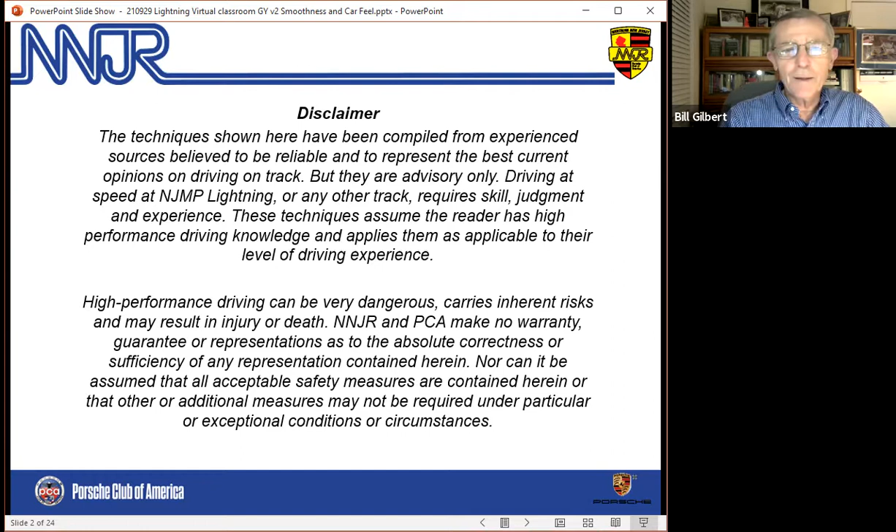So the topic is smoothness, as I said. The beginning here, as always, is just that the caveat applies that we all know when we arrive at the track, we're taking a certain amount of risk, and we're taking that risk for ourselves. So despite anyone, including my best attempt to offer good advice, you have to use your own judgment.

So what I'm going to cover tonight: a quick reminder on the basics of track driving for those who are relatively new to driving on track. Most of our focus will be on smoothness. What is it? Why does it matter? And then how to achieve it, or how to get better at it, including how to read the car. And then we'll jump into turn by turn for Lightning.

So the basics of track driving, I think most everyone on the call tonight knows these things. The reference points kind of tell us how to drive a consistent line, starting with where we get on the brakes, going to where we turn in, where we apex, and where we track out. That sounds pretty simple. We all know it's not quite that easy to do it consistently, which is the key thing here, emphasis on consistent.

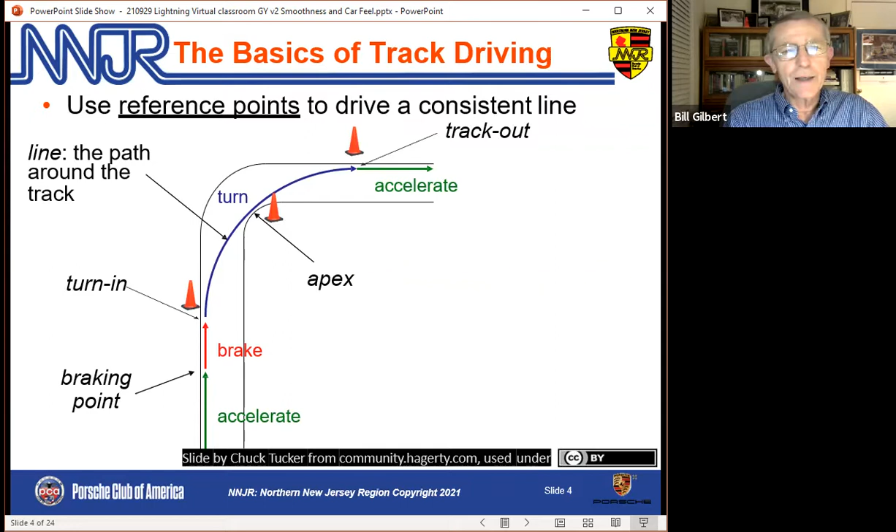And if we do it right, there's a rhythm to that, right? As we get used to a track or a particular corner, we're on the gas going down the straight, we're on the brakes, we turn in, we release the brakes. We repeat that process as we go around the track.

I always like to remind people about mirrors. Most of you on this call have heard me say this before, so I'll do it quickly, but mirrors need to be adjusted properly, starting with getting yourself seated properly. And then most people have the rearview mirror in the correct place, able to see square behind the car and as far as possible. What many people don't have adjusted properly are the side mirrors.

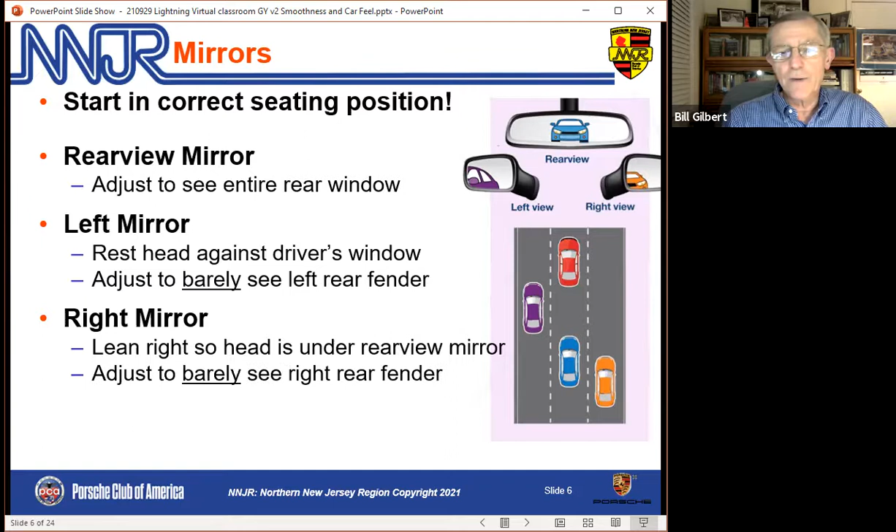So the left mirror needs to be generally pushed out, and you do that by putting your head against the driver's window and pushing the mirror out until you can just see the back corner of the car. And then you do the same thing on the right by leaning your head under the rearview mirror and pushing it out. And when you do that, you basically don't have a blind spot. So instead of the normal situation that you see here, where there's a blind spot that'll absorb a whole car, even a whole truck if you're on the highway, you end up with either very small or no blind spot.

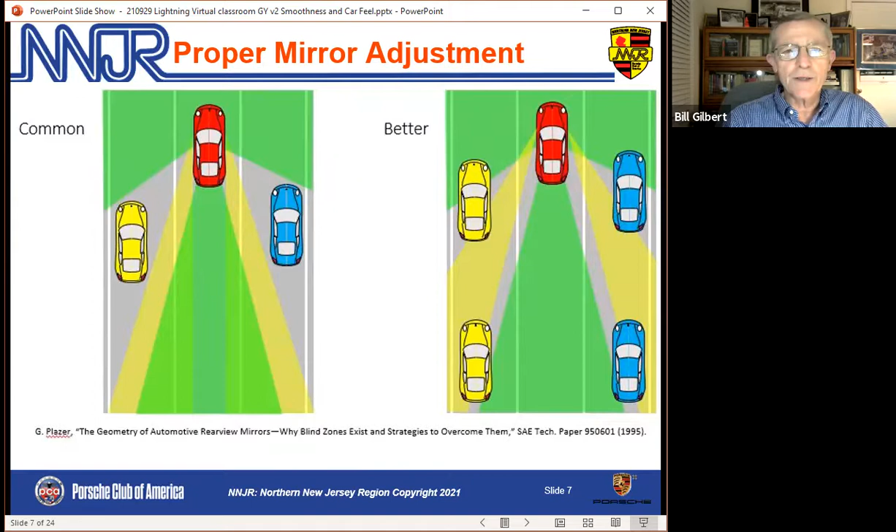And this is really important on the track. When you've given a pass signal, you'd like to know where that car is if they've moved from square behind you, and you can't see them if your mirrors are adjusted like they are on the left. If they're adjusted like they are on the right, you'll know where that car is. And the same obviously applies in highway driving. So, quick reminder about mirrors.

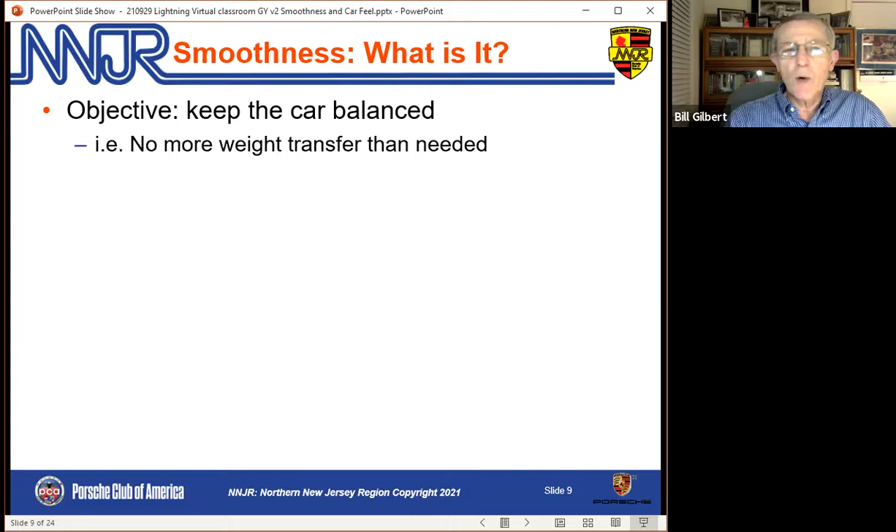So with that, let me dive into tonight's topic, which is smoothness. So what is it? I think most of you could answer this question. We want to keep the car as balanced as possible. No more weight transfer than absolutely required. To do that requires just enough input. I love this quote.

Race drivers are minimalists. They put the least amount of input in. You may not think about it that way, but that's really what we're striving to do. That, of course, requires deliberate and precise use of all the controls. And the counterpoint to all that is we don't want to upset the car. This is the opposite of upsetting the car.

And the Alain Prost quote at the bottom: when I look fast, I'm not smooth and I'm going slowly. When I look slow, I'm smooth and going fast. Those of you that have done autocross or watched drivers at autocross, that absolutely is correct. The cars that are going the fastest generally look the slowest and vice versa.

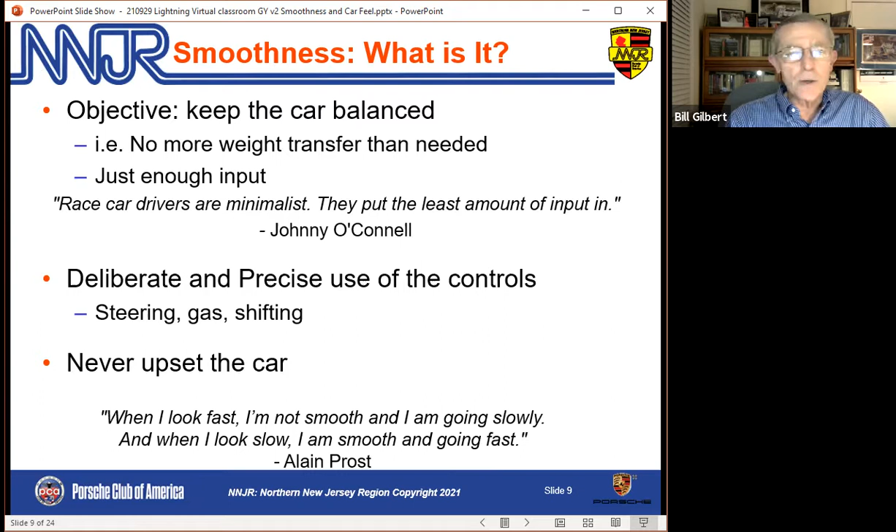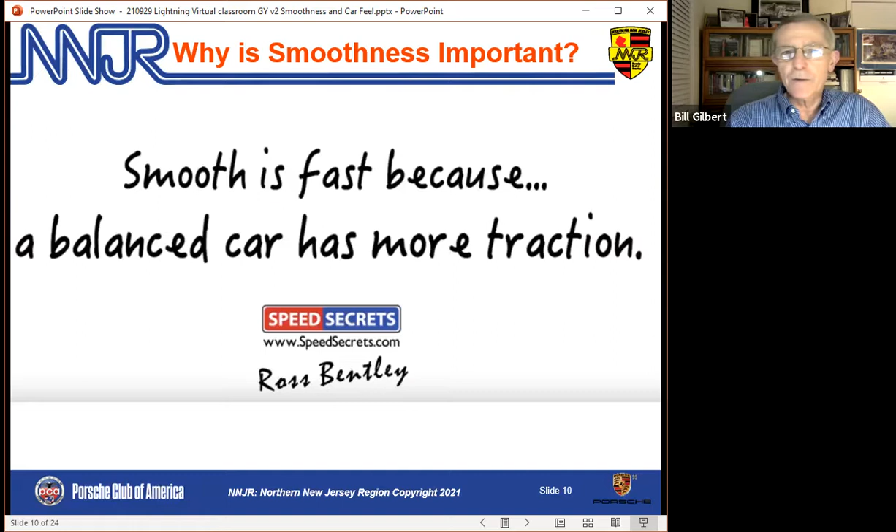So why is it important? Well, here's Ross Bentley's answer to that question, and it comes down to the basic physics. Smooth is fast because a balanced car has more traction. We're keeping more weight on the tires and in a more controlled way, and therefore, we're going to be faster. And by the way, we're going to be safer at the same time. So you probably all know that.

So, awareness: just being aware of how smooth am I driving right now? Pick one aspect. Maybe it's getting on the brakes. Maybe it's how I turn the steering wheel. Write that down in your notebook and give yourself a rating. Hopefully it's not a 1, but it's probably not a 10, right? So if you really feel like the way I'm getting on the brakes or the way I'm releasing the brakes could be a lot better, maybe you rate yourself a 5 and you want to work on it.

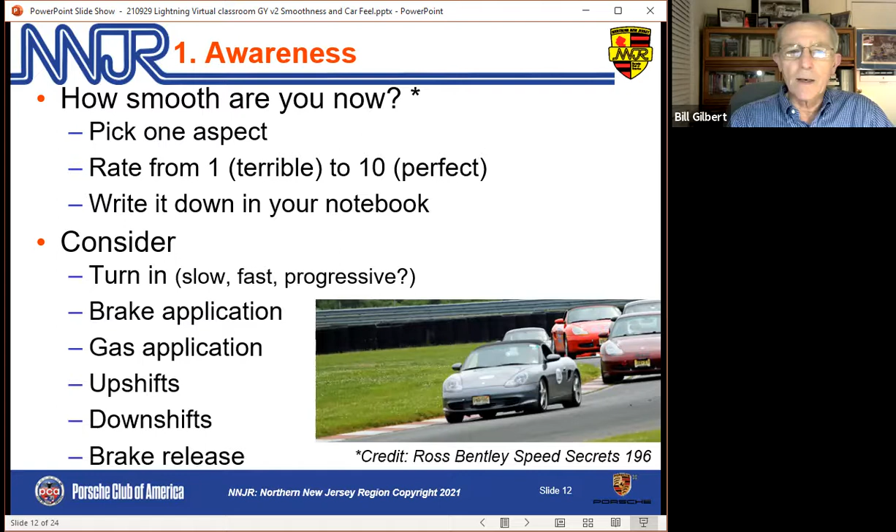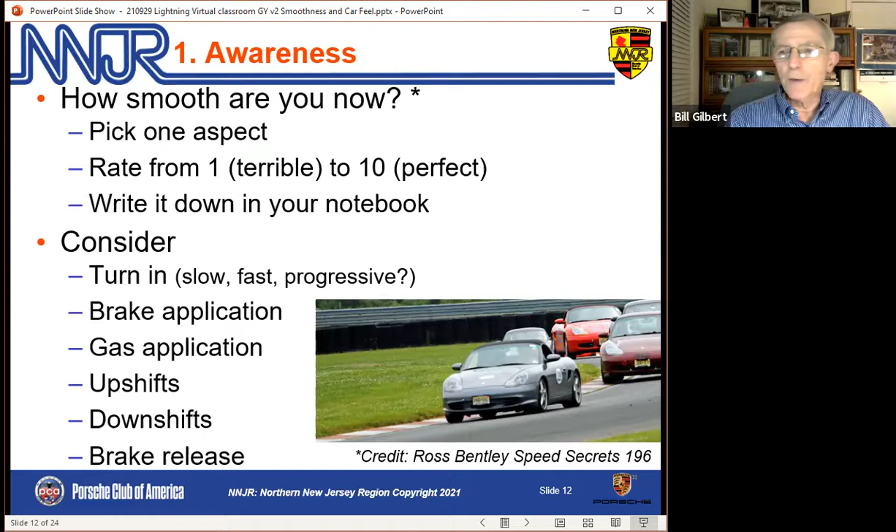And there's lots of things you can think about. How are we using the steering wheel? Am I turning it too slowly, too quickly? Am I doing it progressively where I need to? How am I using the brakes, the gas pedal, the gear shift, and so on? Pick 1 or 2 of those that you think are either a weakness that you want to get better at, or one that you're really good at and you want to get even better at.

The other part of awareness is just the basics here. Most of you have probably heard a number of these things from instructors. Our controls are not on and off. They're a rheostat, not an on-off switch. No jerky movements, nothing sudden. You'll hear people talk about winding the steering in and unwinding it, turning the wheel progressively, letting the car take a set.

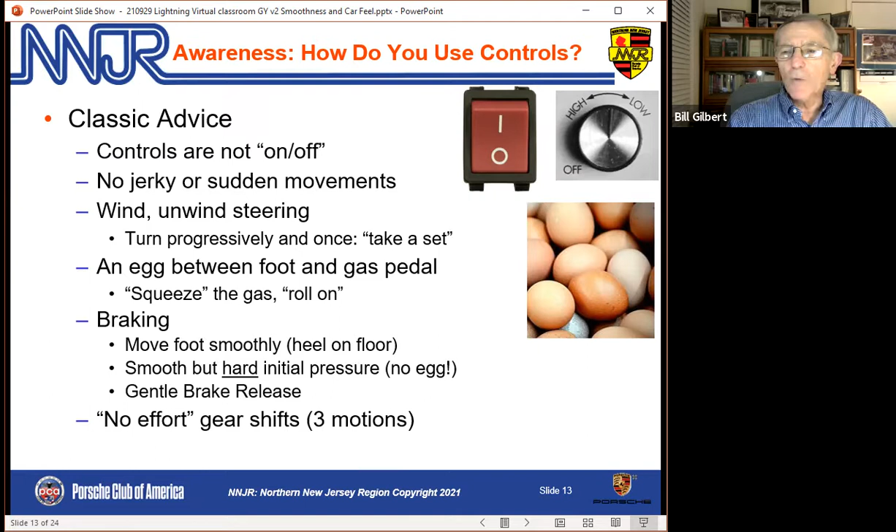An old figure of speech that not everyone uses anymore, but is still applicable: an egg between your foot and the gas pedal. So we want to squeeze the gas pedal. We want to roll on the gas. We don't want to jab at the gas pedal or anything like that. In braking, we want to move our foot smoothly from the gas pedal to the brake, and our heels should be on the floor when we do that, by the way. So we just are pivoting our right foot from the gas pedal to the brake pedal.

And when we do get on the brakes, we don't want to use the egg at that point. We want to be smooth, but we want to get on the brake pedal hard with that initial pressure without jumping on it. We want to do the reverse when we come off. We want to release the brakes gently as we come off. And gear shifts, for those who aren't driving PDKs, need to be nice and smooth.

The no-effort gear shift idea here works as follows. The idea is that every shift has 3 motions of the lever. One is out of gear. So say we're shifting from second to third. We're in second. So the first motion is out of second to the neutral gate. The second motion is across the gate. The third motion is into third gear. And we do that with 2 or 3 fingers on the gear shift.

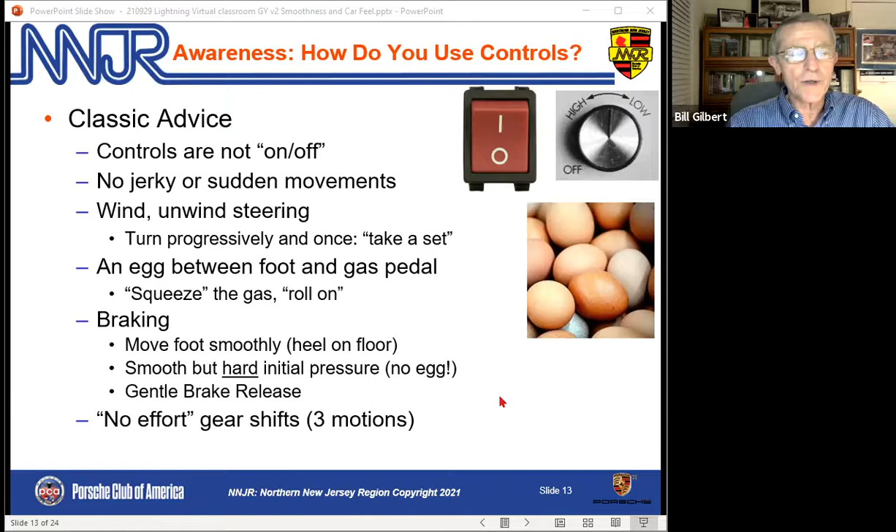So second tip, vision. Everybody's heard about how important where we look is and how we use our eyes. It's absolutely a prerequisite to being smooth, and basically means how far ahead are we looking? Are we looking through and around each corner? Are we looking where we want to go? And are we really looking a long ways in front of us? 20 seconds, according to Skip Barber. So if we break that down a little bit, I've used this slide several times before, you've probably seen it, but it kind of summarizes how we want to be using our eyes.

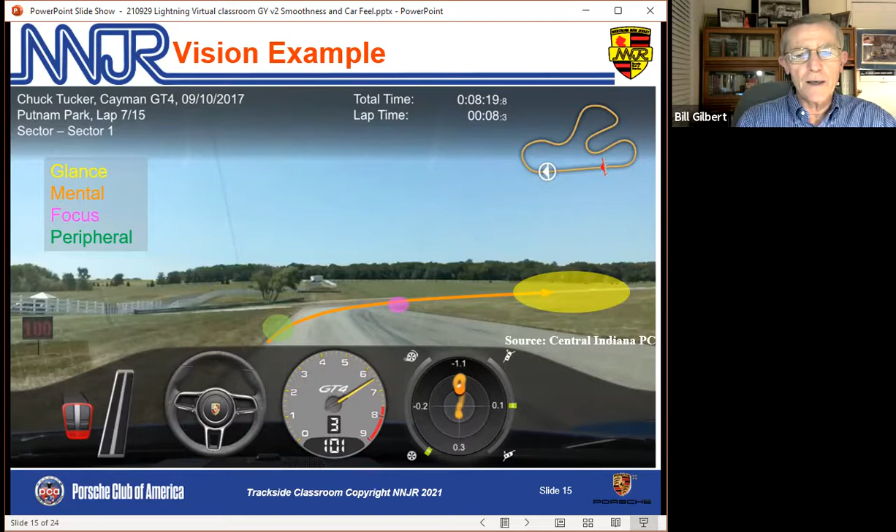So, third tip: know how to read the car. And that really comes down to letting the car teach you.

There's a great comment that Dennis Maschio made when he spoke on an NNJR Zoom meeting late last year. By the way, he's coming up sometime in the near future, perhaps next week or perhaps later, I'm getting confused input on that. But regardless, if you get a chance to listen to him or listen to the recording from last year, I strongly recommend it.

Among other things, he talks about how to drive several corners at lightning speed. But in the beginning, he talks about the fact that you can't really drive a car, you can't force it to do anything. You're just, as a driver, managing or guiding the car. It weighs 10 or more times than any of us weigh, and we have the controls, but it's in charge. So sensing that car, learning what it's telling us, is a learned skill - something we can practice, something we can work on, something we can develop.

Unfortunately, electronics get in the way, because they kind of mask what the car is doing or try to make up for what the car is doing. So the challenge here is, can we develop sensitivity to what the car is telling us? How do we do that?

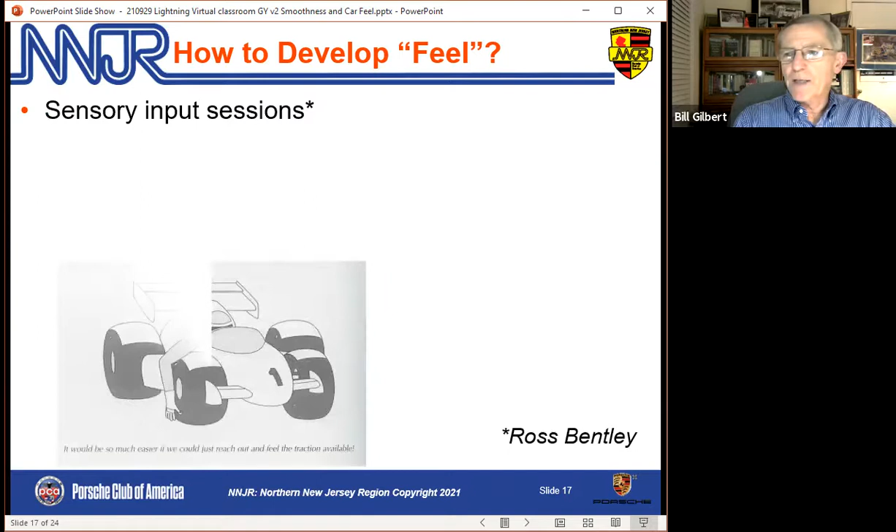Ross Bentley's answer to that question is sensory input sessions, where we take a session on track and focus an entire session on what we're feeling - the seat of the pants, the kinesthetics. We take a different session and focus specifically on sound, what we're hearing. Another session where we focus just on vision, one where we focus just on what we're feeling in the steering wheel. In other words, heighten our sense of awareness of what the car is telling us by consciously focusing on just one dimension, and eventually that becomes more second nature.

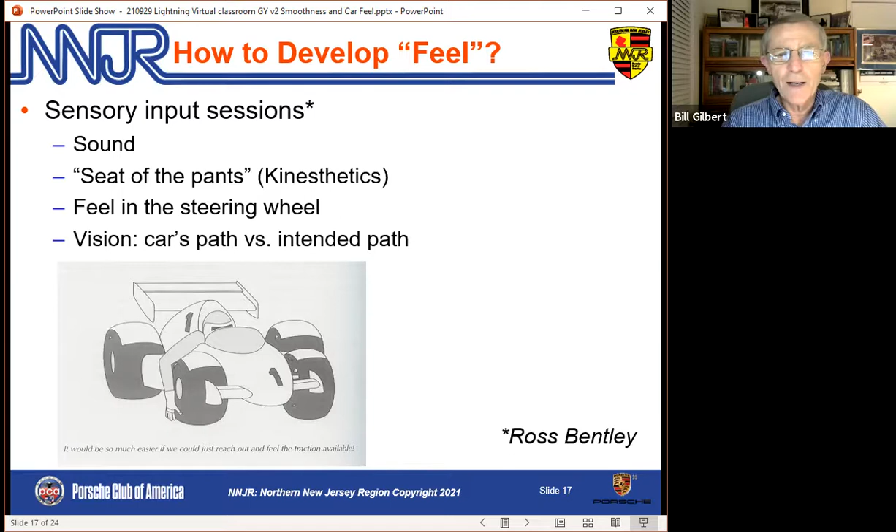All of you have heard me suggest these kinds of things before, and I suggest them not because Ross Bentley suggests them, but because they work. They're the kinds of skills that even pros work on, never mind that they're valuable to those of us who are far from pro drivers.

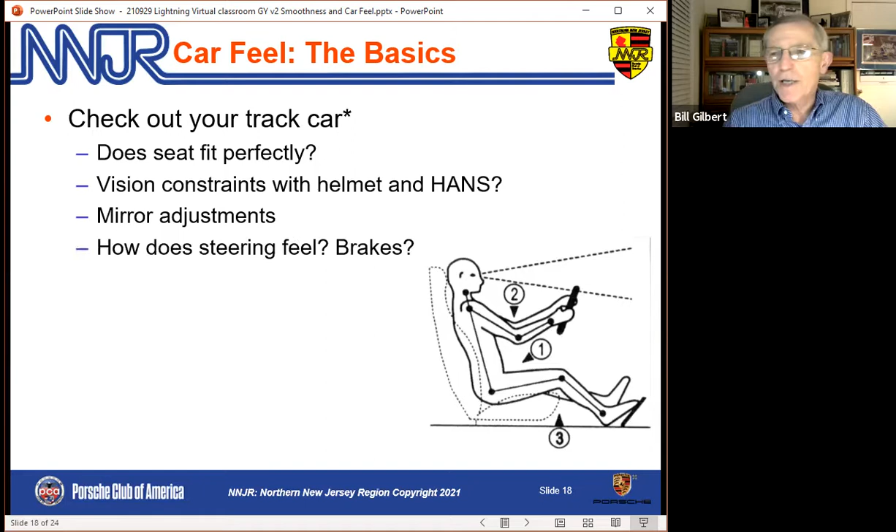Some of the basics that are prerequisites: are you seated properly in the car, so that you're not sliding around and can feel what the car is doing? Can you see - is your helmet or your Hans getting in the way? Are the mirrors adjusted so you can see properly? All those kinds of things.

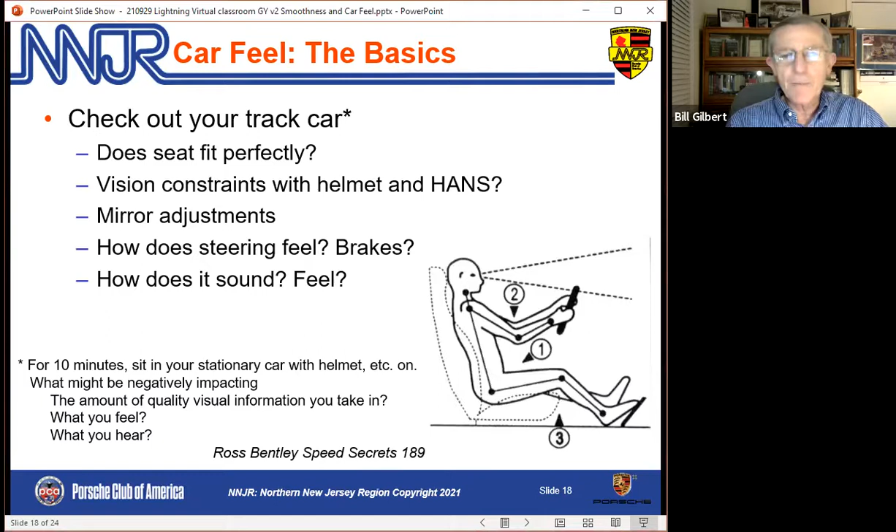Ross Bentley suggests just sitting in your car stationary in the garage or wherever, and making sure that everything is comfortable, that your senses aren't being hindered by something that can be corrected - in terms of adjusting how you're seated in the car, adjusting how your belts or Hans or whatever is adjusted. I mean, that's kind of the basics, but surprisingly, a lot of people can make simple adjustments that make a difference.

Other obvious ways to speed up how you know what the car is doing are safe places to approach the limit of the car - car control clinics, autocross, skid pad. I strongly encourage, if you have opportunities, take advantage of those. Unfortunately, we haven't been able to do a car control clinic for the last couple of years, but hopefully those will be back on the agenda next year. Great place to get that sense of what the car is telling you in a safe environment.

But off the track, think about ways to speed up your learning in smoothness, even when we're not on the track. One way is to focus on refining one control, whether it's brakes, steering, or the gas pedal, and use your street driving to reinforce that. Most of us spend 10, 100, or 1,000 times more time driving on the street than on the track, giving us opportunities to improve our use of the car's controls. Ross Bentley has a book oriented more to street driving that can help with this. But let me use an example I've used for years and years.

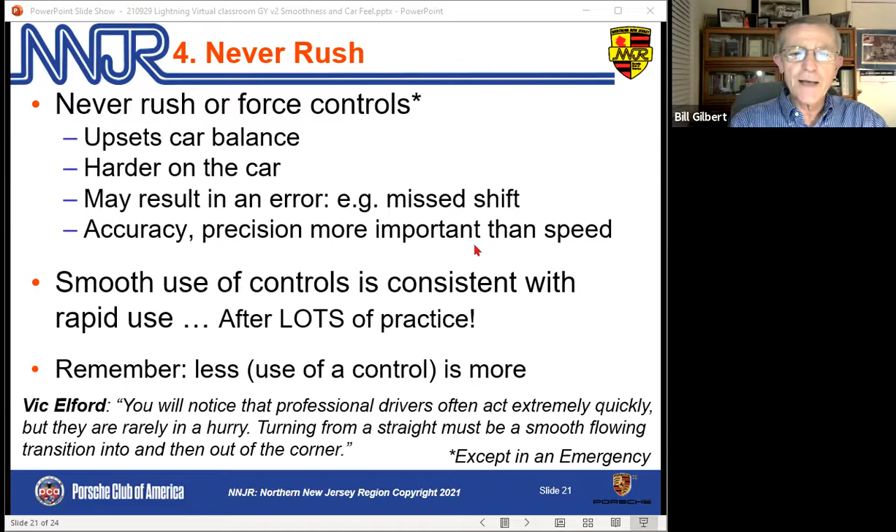Eventually, as we use the controls smoothly, we become quicker. But I emphasize lots of practice, and I'll give an example here.

I had the fortunate circumstance a few years ago at Watkins Glen to have David Murry ride with me and then drive my car for a few laps. I was blown away by how hard and fast he could get on the brakes, braking for the bus stop, without upsetting the car. I've practiced that before and since, and I still cannot replicate what he did. He's done that thousands of times more than I have, probably 1,000 times more, and I've been driving a long time. So practice on how we use the controls is a big deal.

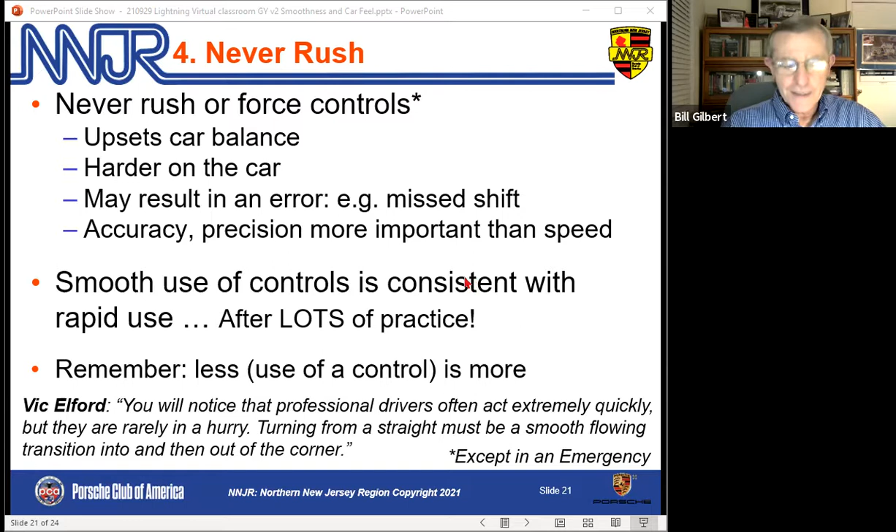Just to reiterate what we said before, less is more in this case. There's a Vic Elford quote about how professional drivers act quickly but are not in a hurry, and I think it's a good way to think about what we want to be doing.

So to summarize on smoothness, remember the basics that we talked about. Smooth is fast, keeping the car balanced. The way we can get better is to be aware of how smoothly we're driving, to look ahead, especially far ahead.

I've suggested some ideas here about how you can learn more about your car and how to feel it. Sensory input sessions, making sure your seating position and mirrors and so on are correct.

Take advantage of opportunities at lower speeds and safe environments to feel the car right at the limit. And perhaps just as importantly, practice a lot of these things in daily driving, and you'll get better.

And an interesting quote here from years ago, one world champion driver talking about another world champion driver before he was a world champion, saying he was mellow on and off the throttle, calm, smooth, almost slow.

Now, obviously, he was not going slowly, but this is one professional observing another one and talking about how smooth he was with the controls, just reinforcing what I just said.

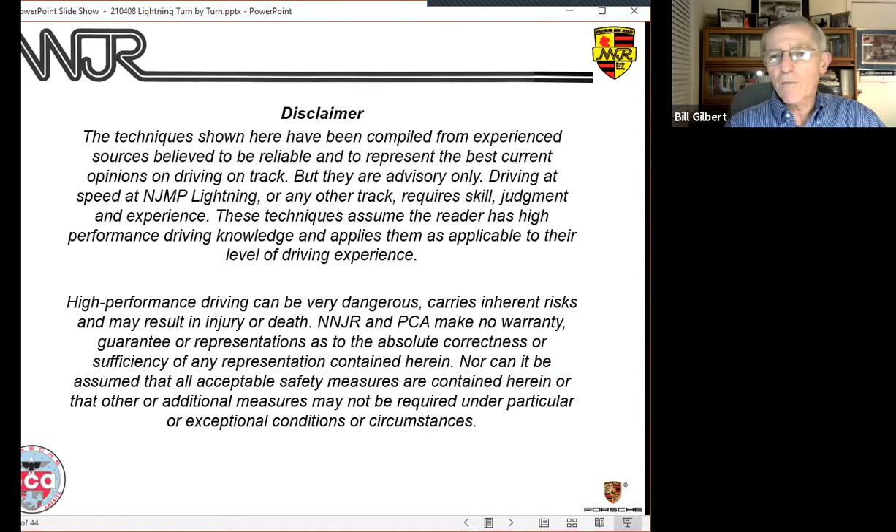All right, so let's talk about Lightning. Normal disclaimer here. I'm going to offer some advice about how to drive it, but use your judgment and listen to your instructor.

Be sure to be safe. Don't try anything I suggest here that doesn't seem right to you, or that your instructor doesn't agree with.

Passing zones, just as a quick reminder, the front straight and the straight between 1 and 2, passing is on the right. And that's mandatory in all groups, to keep things safe.

But there it is, early on the right, later on the left. The section between turn 7 and 9 is the reverse, right?

Early on, we pass on the left immediately after turn 7. Later, and again, the easier passing for most students can be done on the right side, between 7 and 9.

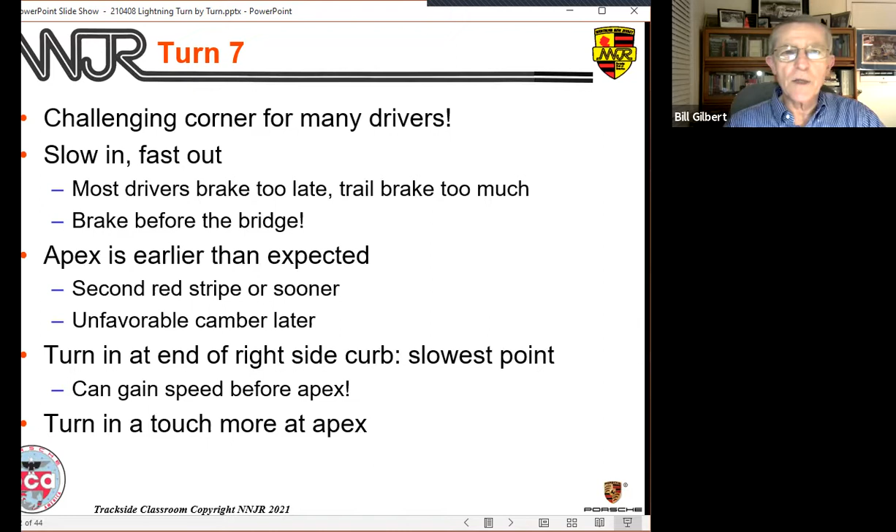Turn 6 is just the kink in the straight there. Turn 7 is a challenging corner for many people, for a lot of reasons. It's absolutely a slow in, fast out corner. But most drivers wait too late to brake, carry too much brake into the corner, and don't set the corner up properly. The apex here is earlier than you would think, and I'll explain why in a moment, why that works.

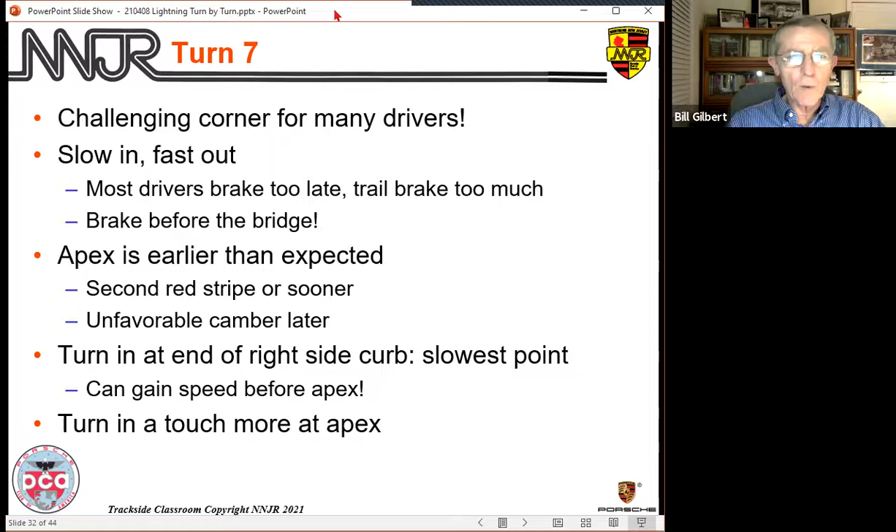So one of the things that causes people to brake too late is here, the brake markers are way too late. I don't know why they're set where they are. Maybe a Formula One car could stop in that distance, but the rest of us need to get on the brakes before the brake markers, probably at or before the bridge in most cars, because the braking zone, when we get into it, is downhill, right? So it's not that helpful.

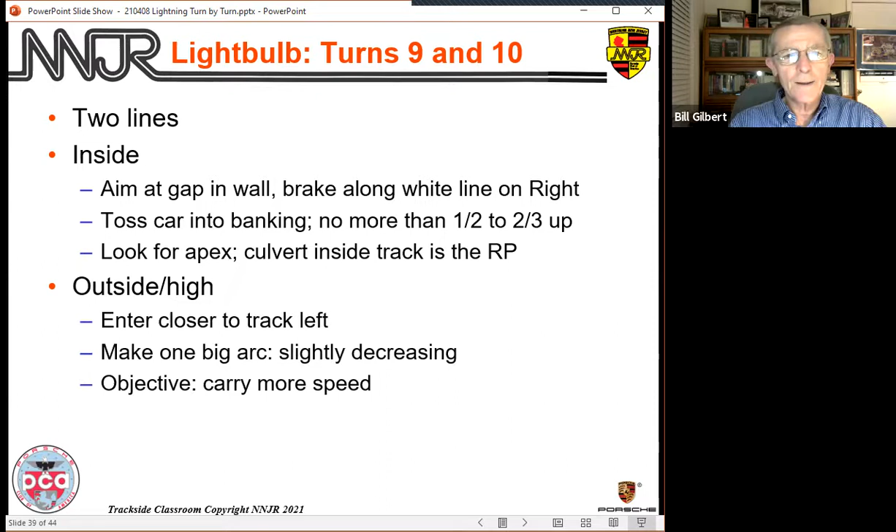Now, some cars, if you have a lot of horsepower, you have to do quite a bit of braking here. Slower cars, not as much. But whatever amount of braking, this is a good place to do it. And because it is straight, we can definitely trail brake as we get up into the banking, but we can certainly get the majority of whatever braking we need to do done in that straight line.

This is a very long corner. We can't use the gas pedal to do anything other than balance the car for a while. So why not carry as much speed as we can safely do up into the banking, let it scrub some speed off, and then pick up the line and move around.